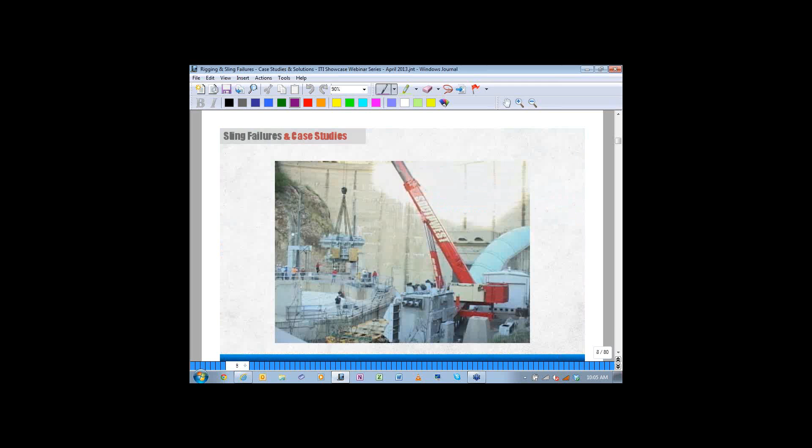So we continued to evaluate that further and segregated it down to slings. Out of those 60, we had 23 sling accident investigations. And of that, I think the surprising element is 87% of those accidents involve synthetic slings of some type. That grouping, of course, is web slings, round slings, or synthetic rope slings.

The predominant type of material would be web slings and round slings. We do have a few synthetic rope slings in the review, but let's take a look at the mode of failure for these slings between the four different categories we initially highlighted: synthetic slings, chain slings, wire rope slings, and rigging hardware.

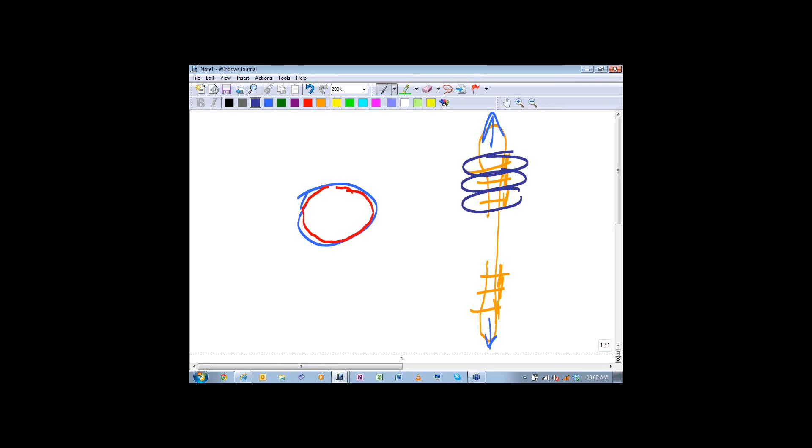So that slight reduction in diameter affects the ability for those cable clamps to actually hold. They are torqued, but over time, that reduction can affect the clamp's ability to hold. That's why Crosby and CM and others encourage us to retorque those after taking initial load. But at the end of the day, what occurred in both of these circumstances was that after the clips were applied, the rope slipped through the clips and dropped the load. Really terrible circumstances and results from that. But there's a huge reason not to be building slings in the field, and this gives us good food for thought as to why not to do that.

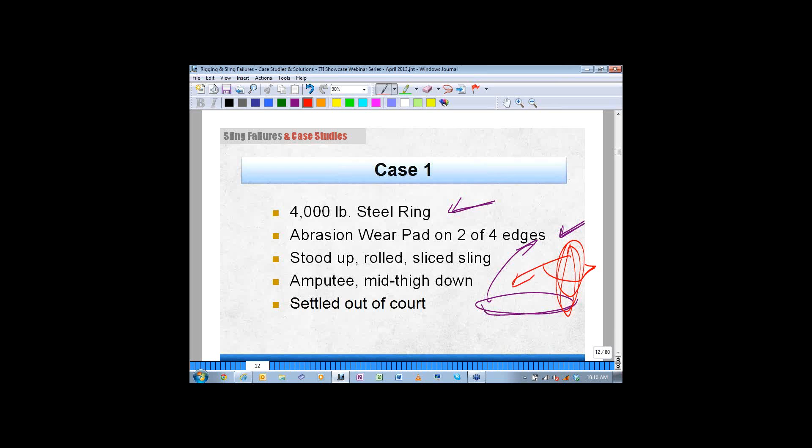Let's go on to our case studies. Case number 1 involved a large steel ring, which I'll show you in a minute. There were a couple of abrasion wear pads on this ring. This was in a machine shop, so it was being milled on one surface. The idea was to stand the ring up vertically with an overhead crane, in a vertical position, then rotate it 180 degrees and lay it back down.

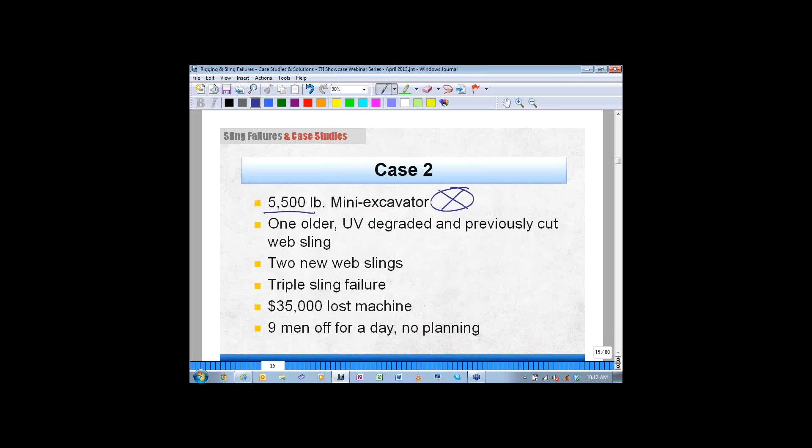This involved a mini excavator and about almost 6,000 pounds. They had 3 slings involved: an older sling that had some UV damage and had been previously cut in a couple of places—I'll show you that—and then 2 new slings. It was actually a triple sling failure, very unusual, but it did. It dropped the whole unit, and pretty good cost. As a result, 9 folks were given the day off as a result of no planning.

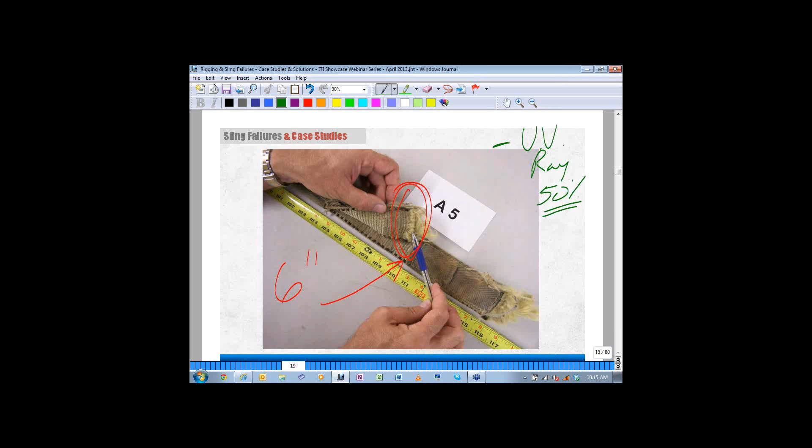This is really kind of a two-step failure—well, three steps really, and I'll go over those very quickly. That has to do with, one, that we had a loss of strength because of UV ray degradation, and we are in about the 50% range based on the age and discoloration of this sling.

So first we have loss of strength, total strength. Second, we had prior damage, and that is the result of these cuts that were on the inside near the wear pad, inside of the bearing point of the eye. So we have inside cuts and outside UV damage, and then we had a slight overload condition.

It's one of those perfect storms of events that show up all collected at one moment in time. They ended up with 70% of the load on that one sling, and they had only anticipated about 50%. Wasn't a lot for the sling, it needed to stay within its rated capacity. However, they did exceed that. But in doing that, they also were fighting prior damage and loss of tensile strength, so when we also overload it, we ended up blowing up the sling.

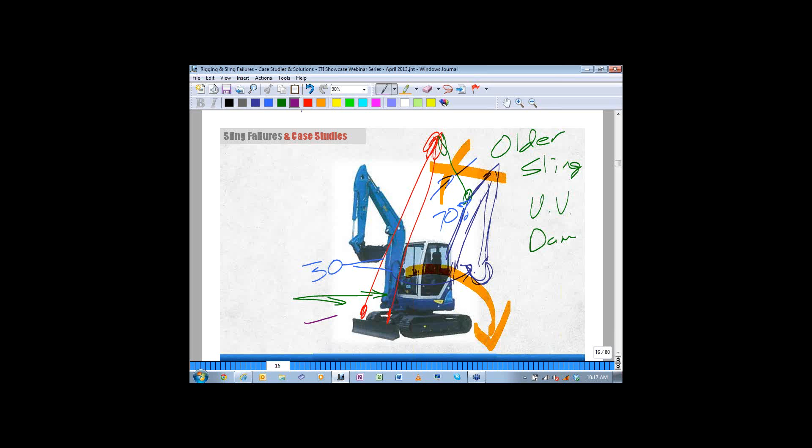And there's some fancy fourth grade artwork for you. So the slings were holding like this, and as the excavator rotated over, the pad eye or lug that was containing that shackle completely rotated, and it pulled the shackle and rotated the shackle actually inside of the sling eye. So we have a loaded sling, dynamically loaded, and the shackle is now hard up against the edge of the blade, and it's rotating, steel turning inside of a sling eye.

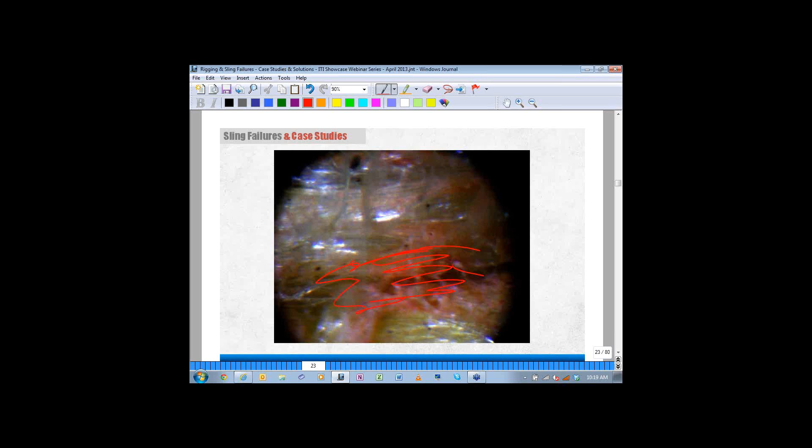So dropping the excavator, very, very avoidable. The first sling was the initiator, and the second two slings simply paid the price for that.

Let's take a look at the third case. This was a large beam, and it was very tall. They were actually erecting or assembling this beam for an HVAC unit on the top of a hotel, using a helicopter to place this beam with. And the slings were used in a choker hitch around the beam, two of them, and I'll just throw in a couple of choker hitches here. And the helicopter pilot did look at those.

It was the beam was about, I'll show you the beam height in just a second. These two slings did not have any protection on them. Helicopters, of course, provide some vibration and dynamics, and they ended up with $40,000 worth of damage as this beam upended and went straight down through the penthouse roof on the hotel. It was a 30-plus story hotel in downtown Seattle, so they ended up with a skylight that they really didn't plan on, but it was a lot of damage.

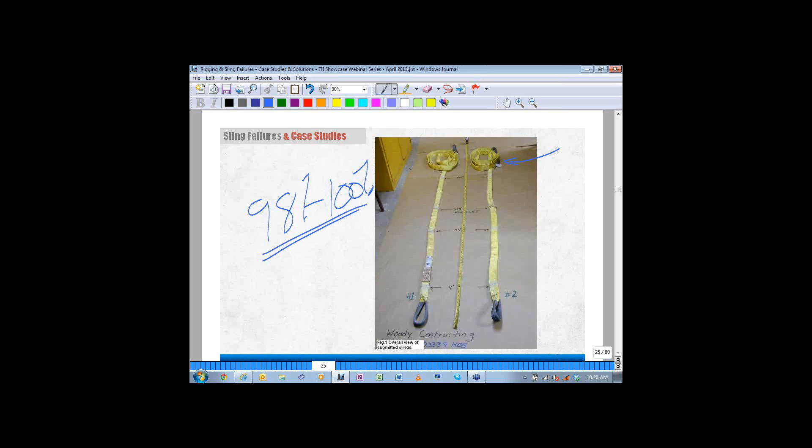Take a look at the slings that were in question. They actually sewed the sling, put an eye back up here in the main body section, and re-pulled these to destruction to try to confirm their original integrity. And they pulled at 98 and 100% of original tensile strength. So they were fine for muscle and strength, a slight 2% loss based on load handling. But they actually proved out the slings were just fine.

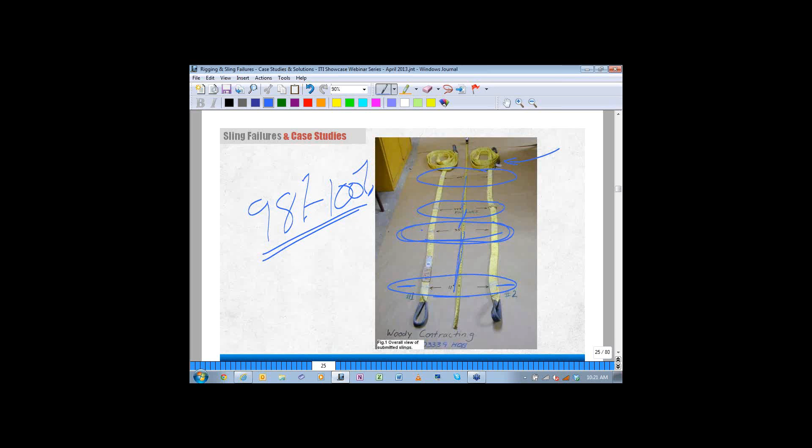Notice this, if you can see the amplification here, first set of cuts were at the 11-inch mark from the end of the eye, another set of cuts at the 33-inch mark, and then another set of cuts at the 44-inch mark, and a final set at 66-inch. So the beam was really 22 inches tall and 11 inches wide.

It gives you a perfect layout of how these two slings were rigged and where the failures occurred. You can tell pretty well where the primary failure was, very clean, fairly square edged. Take a look right here, very straight edge surface, and there was the first failure point. And then as the beam upended, started to turn, you'll notice you've got a curve right here. As the beam starts to invert and go down through the roof, the turn in the sling reflects the curve or the turning axis or the turning orientation of the beam, and there's the second failure.

And this one had friction damage to it as well as cutting. This one appeared to have just more cutting first as its mode of failure, but it was very distinct in the lines of separation. Here's another set of severe cuts and abrasion right there where they were rigged. So you can see, very symbolic of the event.

When folks ask me, gee, how did you think this accident occurred, and they send me a bunch of pictures and this and that, eventually I've just got to get my hands on the rigging or the equipment that's failed. But the evidence will almost always tell you how did it come apart, how did it fail, how did it drop the load. The evidence really will speak for itself, and having and retaining that evidence is very important.

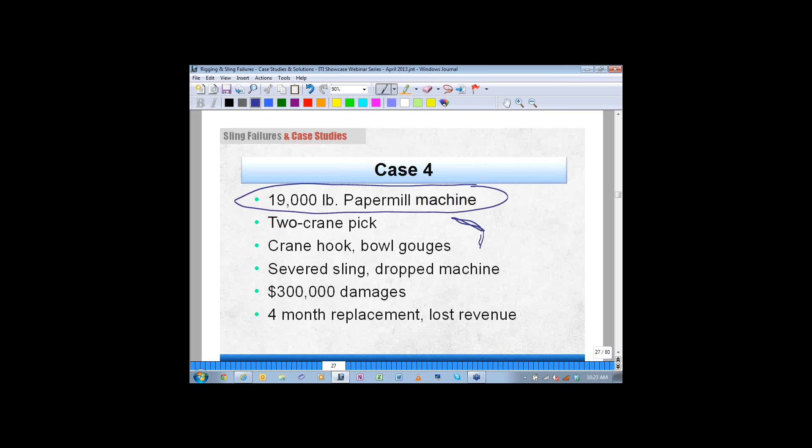Let's take a look then. Case 4: we have a 19,000-pound paper mill machine. It was a smaller machine, but it was large. It was in a crate, and it had hard points about which to basket. But the size and shape of this required that two boom trucks were used side by side to rig this up.

So I'll just give you a quick sketch here. They had hard points here on the crate, and both of these went up to boom truck hooks. This was a fairly good span. They didn't have a spreader bar. They opted to use two boom trucks side by side to pick it straight up and off the trailer that delivered it. And the crane hooks, our evidence showed that we had some damage in the hook bowls, which I'll exemplify here in just a minute for you.

They dropped the load on one end. This whole load came down on one end, crashed, did a lot of damage to the machine inside, obviously broke up all of the crating, and they simply had to load it back on the truck and send it back to the original manufacturer for rebuild. It was a very expensive adventure and something that could have been sidestepped very quickly. Four months replacement time, a lot of lost revenue out of this thing, and very avoidable.

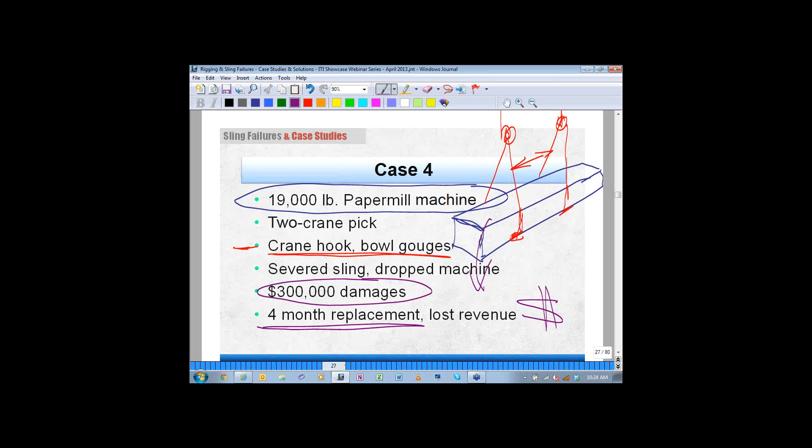And where this really got into a bind, I called the construction company who was involved in this, that was helping during the outage, and I asked the question. I'll just try to do a little bit more of a three-dimensional configuration here. Of course, this was in a swivel, and the hook latch was right here, but the block was here. So I really asked the guy, what was the condition of the hook bowl?

And he said, you know, the sling eyes both went into the hook bowl, and he said, we went out and looked at it - I just got back in my office. Thanks for calling. But the grinding you hear in the background is them dressing the hook up.

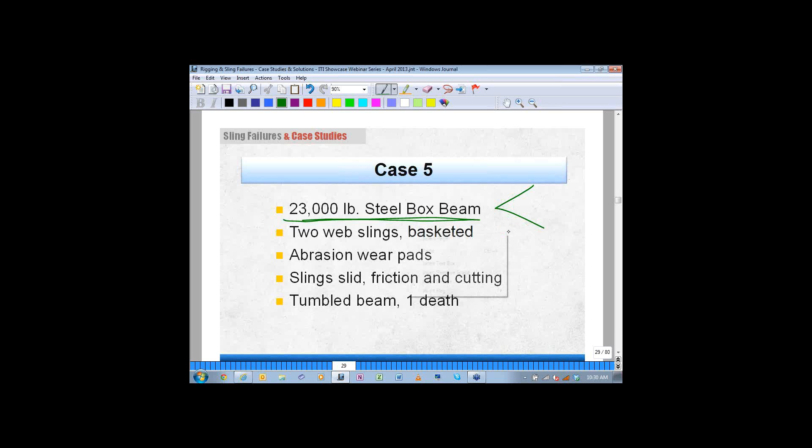Let's take a look at the next one. This is case 5. This is a large steel 23,000-pound box beam, and this was a disassembled crane, and these are the gantry legs for this crane, large box beams. They were basketing using 2 synthetic slings, and we ended up, this was a fatality. We ended up losing a gentleman over this, and the slings slid along the surface, and they were using abrasion wear pads.

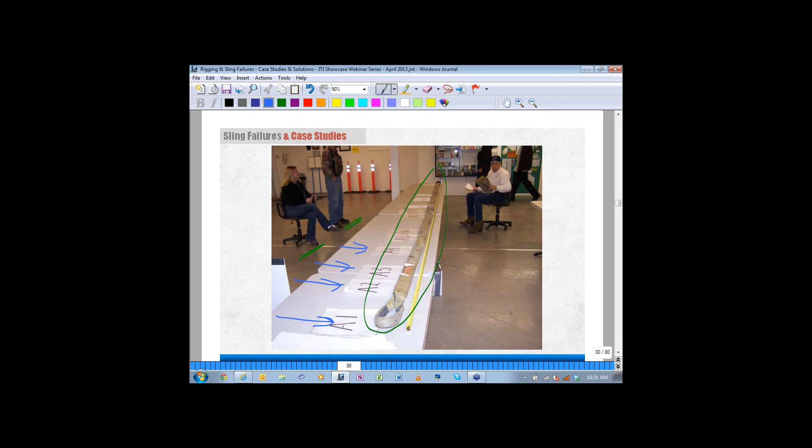So this sling really had seen a lot of service. It had a lot of abrasion already on it. You'll see some degradation based on UV condition, some small nicks, small cuts. Let's take a little closer look.

This is a very, very good example. There are 2 things happening here simultaneously. One, notice how plasticized those ends of the webbing are in their profile. All of this material was very hard to the touch, very brittle, you might say, or very, very tough, plasticized from heat, friction, sliding action.

And really notice how kind of square-ended those are as well. The angle wasn't all that great. It wasn't a huge flat angle that would really initiate this sliding action. We found out that the beams were wet and they were greasy also, but certainly a method for rigging this might have been spreader bars to help spread those slings out and get them more perpendicular.

But we did have an angle there. It was about 70 degrees or so. But notice the other thing.

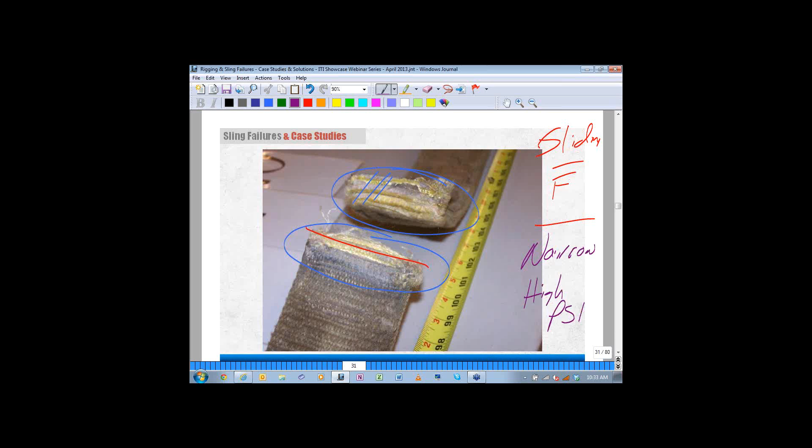We had a sliding condition that created the friction, and the second thing is notice how narrow the slings are. So there is a condition here - we had very high PSI. These were 4-ply slings, with 1, 2, 3, 4 layers of webbing. To get the strength you need, these were high-capacity slings, but they were 4 plies in their thickness. It may have been a little better, though friction was the real culprit, if these slings, instead of being 3 inches wide, were 6 inches wide - that PSI would have dropped dramatically over the width of that sling.

I think a contributor here, in my personal analysis, was that the narrowness of the sling caused high pressure, and as the sliding occurred, it was focused on a very restricted width of sling. If we had a wider sling, with better sling protection, we might not have dropped the load. But I do believe the narrowness of the sling contributed to this overall accident. That's why on boat slings they're wide - 9 to 10 to 12 inches wide - to help spread the load over a broad surface, lower the PSI, and lower the crushing ability to the load. It all has some influence.

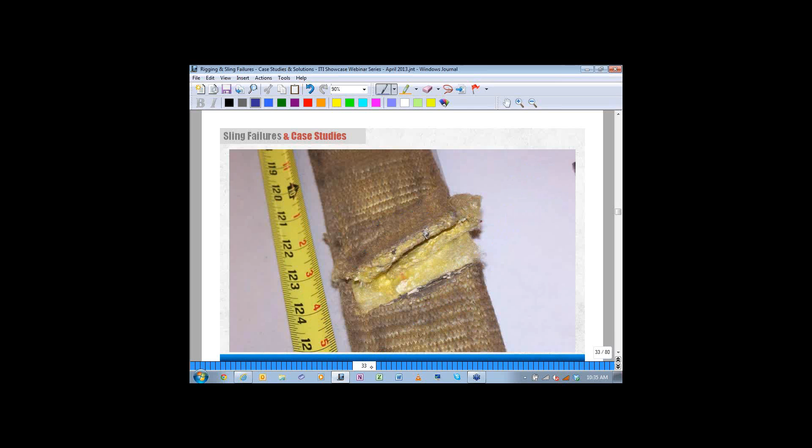But take a look down the sling body. You can see the plasticizing, or thermal damage, to the sling. And then we had some fuzziness with some cutting, but all of this was very, very hard to the finger, to the touch. You'll see these are sympathetic cuts - as the sling slid and failed at one point, it nearly penetrated the other portions of the sling.

Really important to understand here - this was the most shocking part of this particular accident that led to the fatality. They were using abrasion wear pads instead of sling cut protection wear pads. These are very suitable for the right application, but these are 8-inch wide, 12-inch long, or 6-inch wide, 12-inch long pieces of webbing. They're all commercially purchasable, sewn down one side.

They enclose with a Velcro enclosure. But notice the ability of that sling with the heat generated - I dropped this on my shop floor during the investigation on purpose, and this thing thumped. It hit like a rock. This entire surface right here was very, very rigid and solid from the thermal damage, heat damage. You can see the interaction between the sling that had basically ended up penetrating right here, and its contact area on the corner, where we had a sling failure. That whole surrounding area - the wear pad and sling slid as a combined unit and melted the wear pad, in addition to causing the sling to fail.

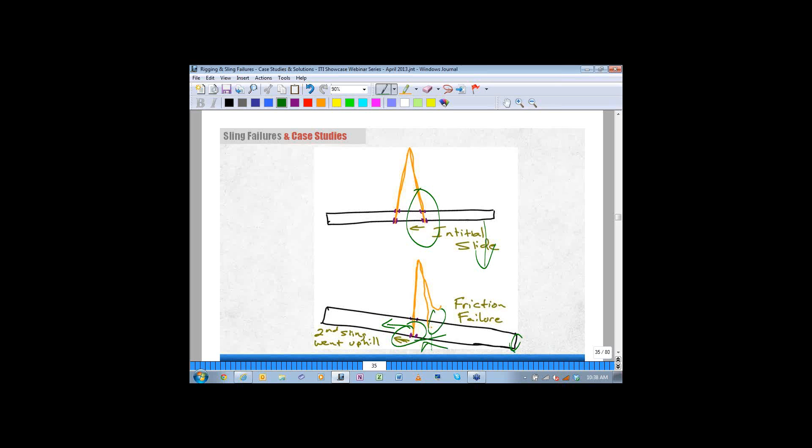This unit eventually tumbled forward off of a large cribbing stand and fell onto the rigger on the ground who was giving signals. The gentleman was standing right here in front and ended up as the victim in this case. So the sling angle wasn't very low - it was a very large, tall angle from horizontal - but being wet, oily, and greasy, slings can slide. So you just want to bank on... here's a case, and I'll just draw this in here.

Here's a great case for a spreader bar going up and then using perpendicular slings right off that bar to encourage straight vertical leg loading and lowering the potential for sling movement along the surface of the beam. Certainly, we still would have been obligated to improve the protection between the sling and the load surface. That was still an issue for me. The load's 23,000 pounds, so the PSI is very large on those sling contact points. We needed better sling protection to hold that sling off of the load.

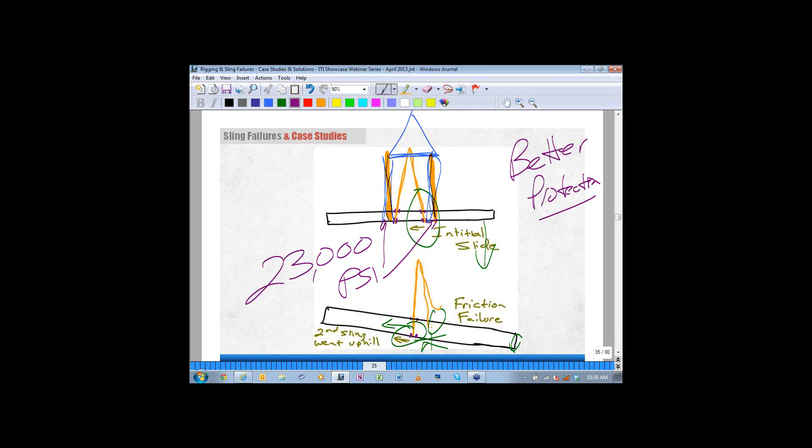The statement is: yes, my organization has experienced a rigging accident within the last blank months. So let us know if that's 3, 12, 24, 36 months, or none that you know of.

Mike, can you help define what a rigging accident might be? I think in this case it's really anything from the crane hook down. If it's a mobile crane or overhead crane, it's not related to tipping a crane over or an overhead crane coming off the runways. It could also be chain falls, drifting a load inside a structure, inside a ship or engine room, or leveling a load with chain falls or come-alongs. Particularly it's about the interaction between the sling or slings and the load, maybe a loss of load by tumbling out of basket hitches or choker hitches. We might have had a failed hoist sling or eye bolt, or a failed rigging hardware component of some other type. So the question focuses from the hook down, not from the hoisting mechanism, but from the sling and hardware connections used to employ the load lift as a whole. That's the focus of that question.

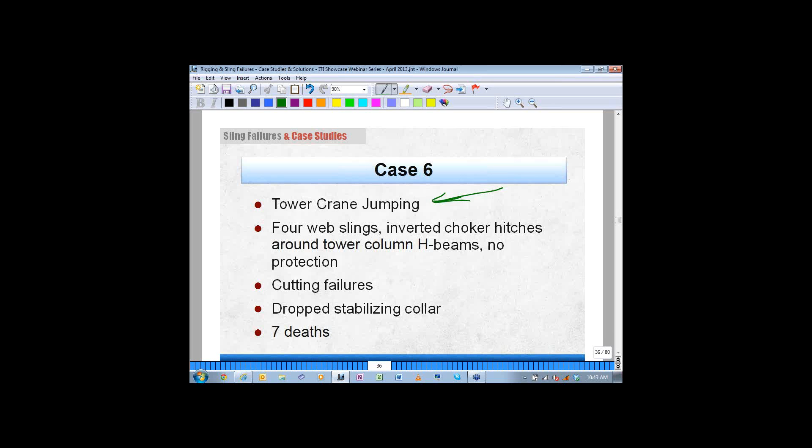Let's take a look at the 6th case. This is a tower crane jumping incident we were involved in - I won't use the name. This one resulted in 7 deaths. Let's take a look at the issues that are currently evident. Four of these slings were used, and these were very short slings, only about 4 to 6 feet in total length. Take a look at some of the failure points there.

And I'll get a close-up shot of one of them. But I'll tell you what, without any sling protection, if an edge is able to actually cut the tag that cleanly, I think that's the most remarkable part of this, is that we've got damage right in here. And notice how sharp that was able to separate that tag in addition to the fibers below it.

So just note how you could have taken large shears to cut sling material or leather and just done the same amount of damage as we did here with the load contact point. Very avoidable, and this is something that can happen at a fairly strong angle right there.

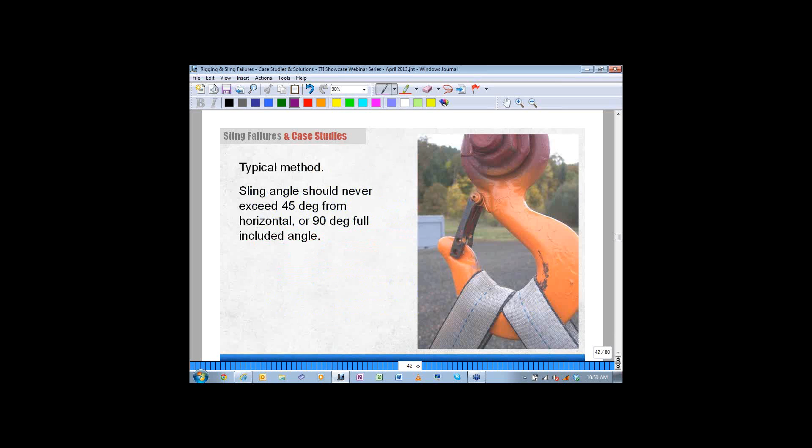Let's take a look. I just threw in 3 or 4 slides here to help us out, showing a typical rigging method on a crane hook. Notice that the maximum recommended angle is 45 degrees from horizontal, or 90 degrees full included. We don't want excessive angles that add tip loading potential, and certainly these hooks need a clean surface. 2-inch flat web and round slings just fit and make that angle work, but make sure we inspect that hook for its condition and how it's going to treat that sling material.

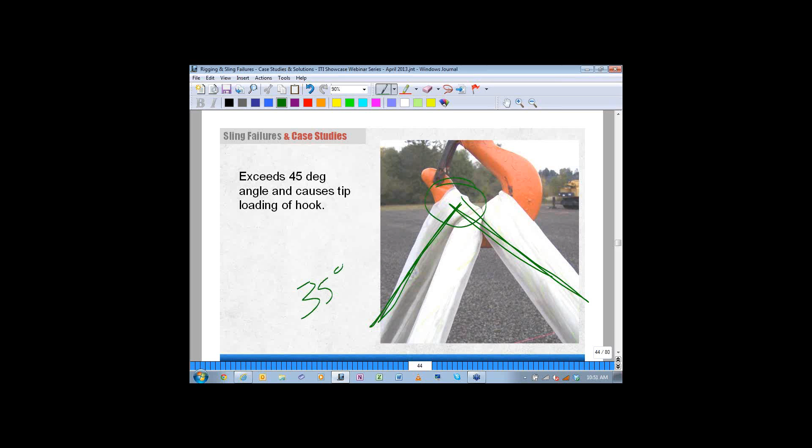Let's take a look here. We've put 4 slings on the hook just for an example, and notice that we've now exceeded from most extreme to most extreme. In perspective, we're really at about 35 degrees here or so, and we're really crowding that sling up on that hook. A good solution: we don't want to overcrowd that and also get flat rigged.

So sometimes what we can do is drop in — and we use a lot of these in our facilities in Memphis and Woodland both — is use a master link at the top, with a sub-assembly coming off of that, and then whatever slings need to rig off of there would help step that off the hook and also give us some hinging and adjustability. These hinging points right here and here help float out the tensions to a 4-way a lot better than just going straight to the hook.

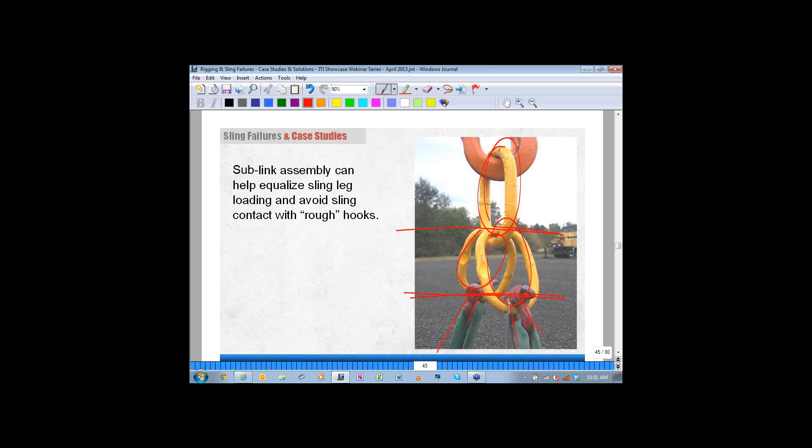You know that often when we rig up 2 legs to take load, or 4 slings to take the load, sometimes only 2 slings carry. So the more hinge points we add into the system, sometimes that will float that out to make it 3 carrying out of 4, or sometimes 4 carrying out of 4, depending on the adjustability of that hardware.

So it's very good. And one point of information — you'll notice right down here on the bottom, in this area towards the bottom, we've got a tag that's attached to that master link. On that tag, it states the rated capacity for the large master link and also the rated capacity for the sublinks. So anybody picking up that hardware knows what the rating is for those links in series right there, and there's no guesswork involved.

So always make sure — because master links, according to ASME B30.26, which is the rigging hardware standard — master links are in that rigging hardware document, as well as shackles, dynamometers, swivel hoist rings, eye bolts, turnbuckles, wedge sockets, and cable clamps. All those links, rings, and swivels are all included in that hardware volume.

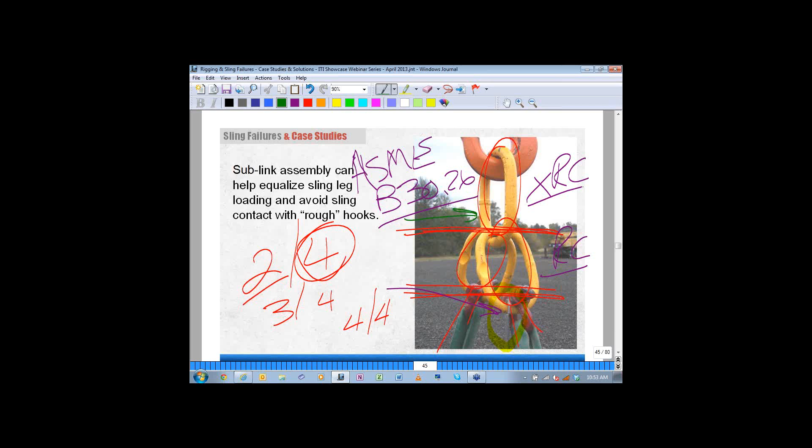And in that standard, there is no requirement that these master links be marked for rated capacity. They need to be detailed out on a spec sheet or a cut sheet from the manufacturer's product catalog, but they get used in wire rope sling assembly, web sling assembly, and chain sling assembly. So what happens is they're depending on these master links being incorporated into those sling types, and they let the tag on that sling assembly represent its rated capacity.

So in this case, we might have this particular master link assembly that you see in front of you. It could be used for a 4-way wire rope sling assembly worth 24,000 pounds rated capacity. It could be used for a four-leg alloy chain sling that might be worth 21,500, and a 4-leg web sling that might be worth 20,000. So in all those cases, they're going to let that tag represent the entire assembly's capability.

That's why the manufacturers do not stamp the rated capacity on the master links — because they want to make sure the final fabricator will rate them according to the material they've rigged them with. However, we use them for rigging components. We'll use them on a hook to help create rigging points for attached shackles, chain falls, come-alongs, and all the other kinds of equipment we want to rig from, and we'll use them just like extended shackles. They're great tools — great to have available, slap them on a hook, and rig from there.

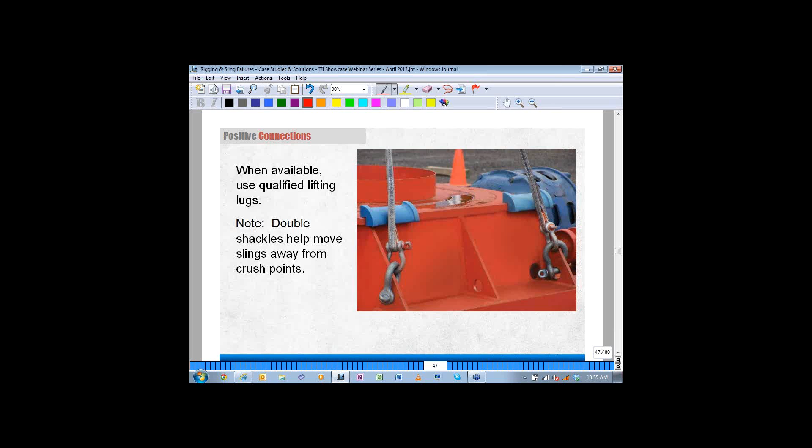The first frame really is, if we had our druthers, if we had our choice, we would go with what we're going to call a direct connection as our most preferred method. Direct connection means I've got hard points to connect to on my load, and I don't have to choke or basket it. The minute I start choking and basketing, I've got to contact the sling to the load.

If I could shackle it or hook it directly to the load by some hardware connection point - notice what we did here, we double shackled right here, and the double shackle moves the sling away from a crush point or a contact point on that gusset. That's an approved lifting point, but if we hadn't put that second shackle in there, that sling would have been very much involved with that gusset with that steel plate, and we wanted to step that away. So what we did was add a second series of shackles to step that up and off, and then let the sling make the connection.

And even on top of that, you can notice we put on some corner protectors just to make sure if the load would pendulum or do anything unusual, we had hard steel plate right on top of the load, and we wanted to make sure and not let the sling interact with that. So we just put some magnetic corner protectors right there to avoid any contact.

So the first one in our decision tree is, do I have a direct connect possible load? Can I make a direct connection and avoid potential sling contact? That helps clean up everything, and it helps minimize or lower the risk. This is all about lowering risk downstream for all of our rigging activities. So can I make a direct connection? Let's go to the next one.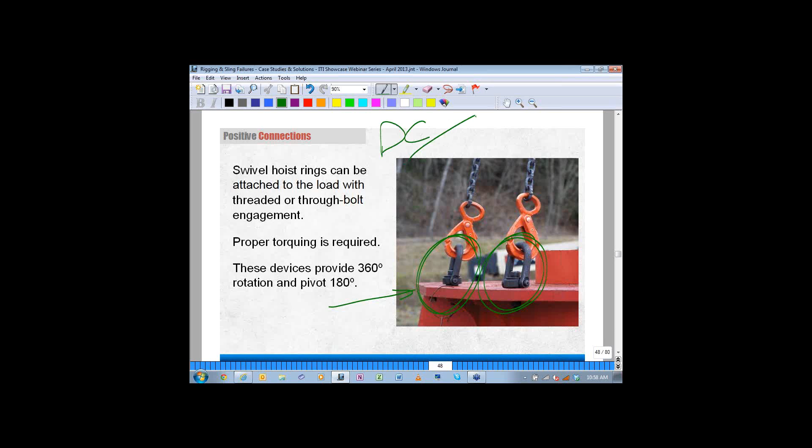So one is direct connection, and the second one is create my pick points, and that are also direct connections. So if I don't have them already naturally, can I create them by using swivel hoist rings?

For all my friends that have been attending a number of these webinars, you know I'm a big fan of hoist rings, and there's probably a dozen different styles, types, and pedigrees of different hoist rings out there. Crosby is a manufacturer of those. CM, RUD makes a terrific line of hoist rings, and others. But there's a lot of options - take a look at a lot of the catalogs that your rigging supplier can provide you and start looking through what particular connector might work best for a particular load, because one won't do everything.

These are through bolted and nutted off on the bottom side there. Some come threaded so that you can just use them into a threaded connection point that will accept that bolt. Some are through bolted - there's a pass-through hole and then a hard washer and nut off the bottom side.

So in this case, we did not have a direct connection opportunity, so we went to creating our own pick points. Let's go to the next step. If I don't have either one of those - we've used this all on the same load - can I find a place or a way to create stopper points that would stop sling movement?

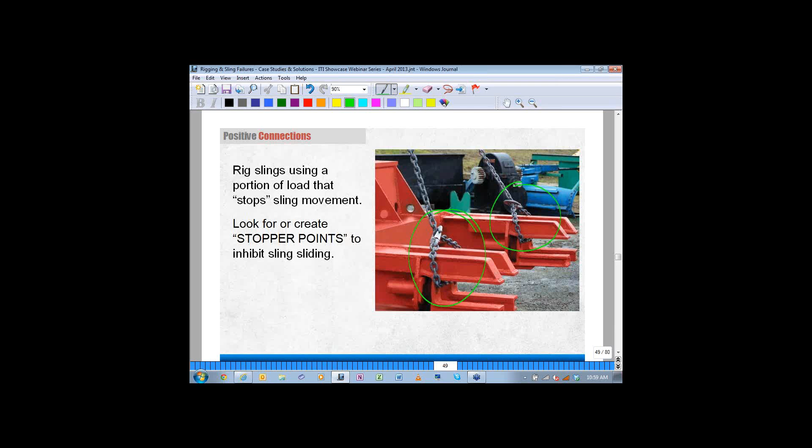So we looked at the load real hard and said, we've got a nice platform here and a wall right here, so we choked right there. We do have the opportunity, the load is very acceptable to the capacity of these chain legs.

The chain sling's very robust, and within capacity you have the opportunity to go around a 90-degree corner as needed, but you always want to check the rating and any limitations. This case is perfectly acceptable and legal. The beauty is we found a place to slide the slings up to a wall or stopper point so they cannot go further into the load. All those sling legs go up to a master link, which goes to the hook, and there's no movement anticipated since we're against a wall. So I've got direct connection, created pick points, and now stopper points. That's my third option in the hierarchy.

Let's go to the fourth option. Will a spreader bar help us take away the opportunity for the slings to run? In this case we've got slings that are base material wrapped around the load pick points, and with PSI based on sling connection points and the width of the sling, these are very suitable for resisting the sling from penetrating that material and coming up to the connection point on the spreader bar.

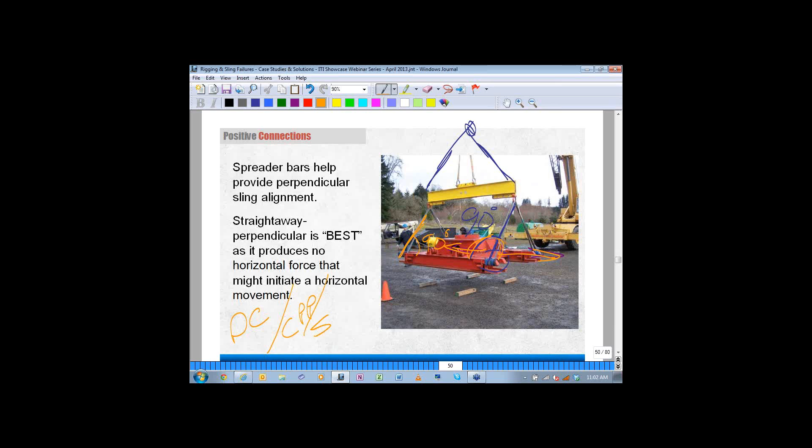So going back to our score sheet, we've got direct connection, created pick points, a sling stopper point, and we've taken away sling sliding by 90-degree rigging using a spreader bar. All my hieroglyphics there. Okay, let's take a look at the next one.

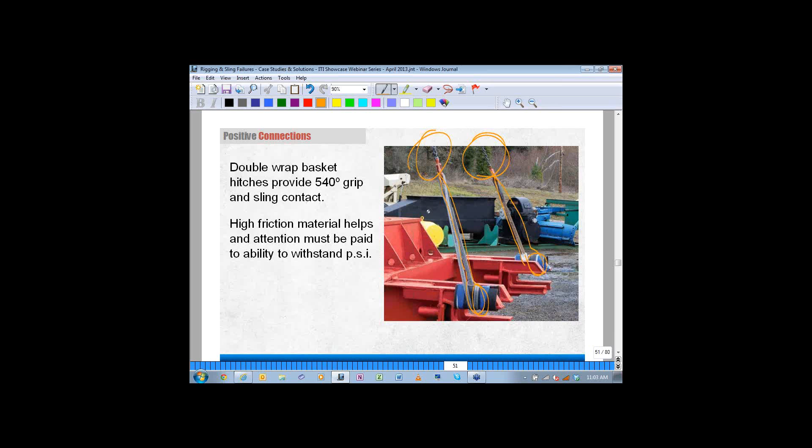We've gone with excessively long slings. Notice we've used chain slings up here at the top for the initial leg extensions off the hook, and then added double wrap baskets on each bearing point. Part of this is baskets equal greatest capacity, and that's always a good thing. Based on our vertical choker and basket options, baskets give us great capacity, double wrapping gives us friction control and grip, squeezing the load and helping minimize the opportunity for sling movement.

In this case these slings, this compound angle runs towards the center of gravity right there. This angle is in the 70-degree range or better. We want to rig at or above 60, so we're at 70 here, we're in great shape, very low risk of running. What we didn't do is push those slings up against that hard wall right there. We let the gripping action of the double wrap do the securement for us as we applied the slings to the load. So no spreader bar at the top.

Everything meets at the crane hook at the master link. Nice long slings, double wrap baskets, great capacity, very minimal risk of sling movement based on the sling protection material as well as the double wrap and nice tall angle. So there's our long legs, a big adder. Nice long slings, good angle, double wrap, and basket. That helps refine our selection list.

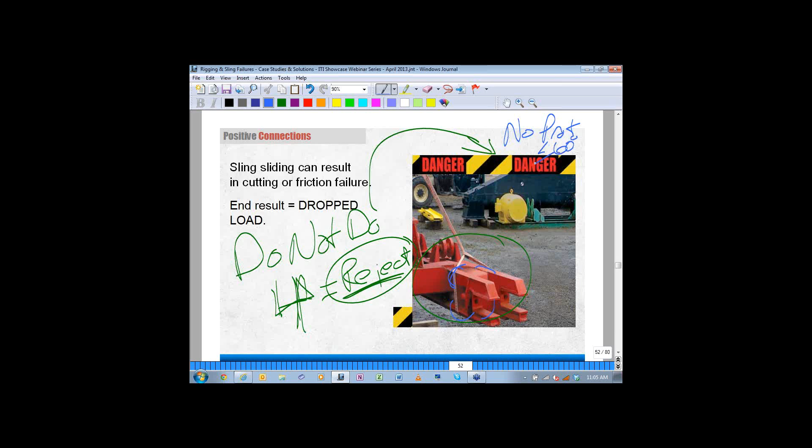No sling protection, nothing in here to protect the slings at any of these corner points. So we had no protection. We had not a great angle - we were probably at 60 degrees, less than or equal to 60 degrees, and we had a choker hitch, which is okay to rig with, but we had the lowest capacity sling being used in that application. So the thin sling, narrow sling is only 1 inch wide. We had a high PSI.

I mean, we just sort of keep going down the list here of all the bad things related to this. But at the end of the day, we had to reject those slings from use because of damage created by this one particular pick for this photo opportunity, to help demonstrate something that was really a great thing to avoid at all costs. Okay, let's keep going.

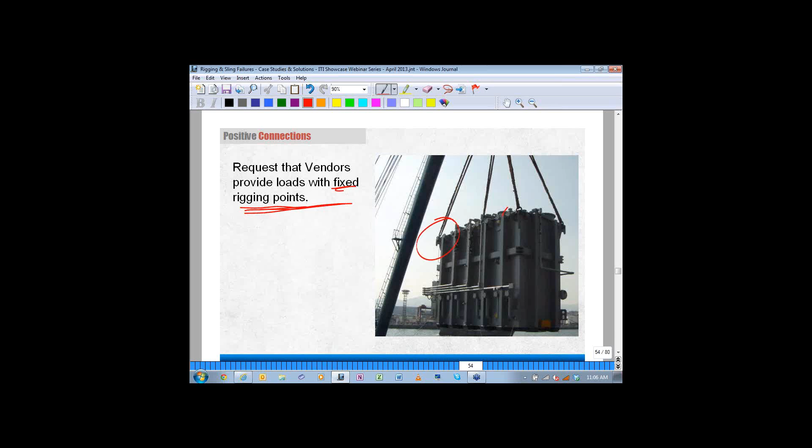Recommendations - how do we fix some of these things? Well, first thing I'd suggest to you is when you are talking with the suppliers and vendors, work with them on trying to get fixed rigging points on your loads. These fixed points will help a lot in avoiding sling contact to the load, and they end up at good structural lifting points. They've been reviewed by an engineer, hopefully, and their integrity is there, and it helps keep the slings away from the load. So anytime we can, let's ask for good pick points on the load.

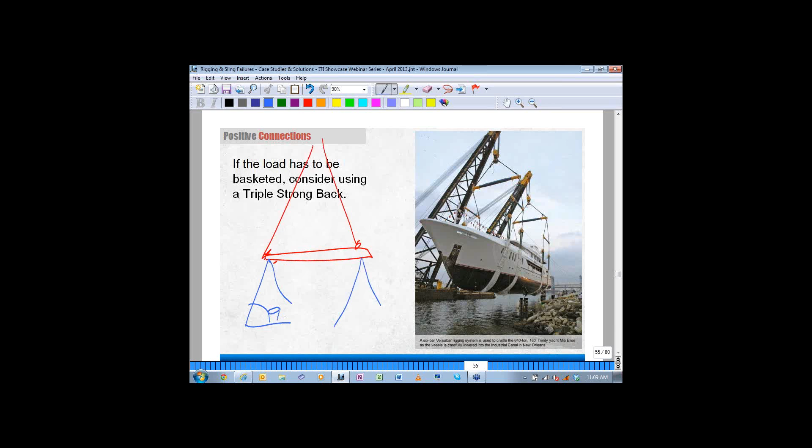When you need to - in this case it's a triple strong back, but even a single strong back or a triple spreader bar or a single spreader bar will work. I'll just draw one end, and if you all remember from our previous, you can have 4 legs coming off. They help hit that load at 90 degrees to the horizontal, to the long axis of the load. In either case it could be baskets, but what the spreader bar does is it takes away this angle issue.

So if we draw in another set of slings that without the spreader bar, we want to come down here like this, come down here like this - we're causing that sling to try to pull in. So if we can take away the desire for the sling to run by using a spreader bar or a series of spreader bars, we will lower the risk related to our load handling activities.

Notice in this photo, these guys have done a great job. They've got 2 crane picks - here's one crane and another crane. Off this particular crane, they've got one spreader bar at the top, feeding down to smaller spreader bars right underneath, and those slings are suspended from those baby bars. They've done that twice, spreading the load out over numerous slings, 4 slings in this case.

Everybody hates to drop a big yacht, and it's happened more than once from loss of control based on poor rigging methods. Let's take a look at the next one.

This kind of helps when the center of gravity is below the pick points, or you've got an unusually large load.

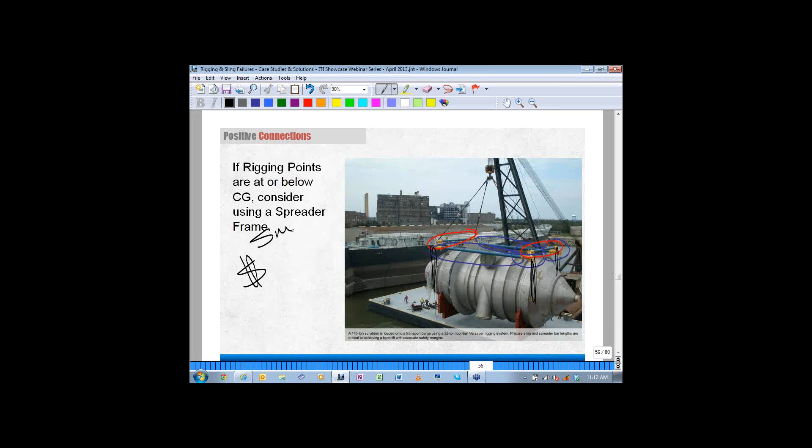We just did a job for a longshore stevedore company for moving a large vessel off, and we used Lifting Gear Hire, LGH. Take a look at their website. You can rent all this gear for the necessary load to be handled for a week or two weeks, send it back out, and they can send you modular bars for use for a variety of applications. We're not endorsing anybody, I'm just giving you one lead there, and we will show you some other manufacturers of products in just a few minutes. But folks that do rent gear, this could help - you don't have to buy all of it. Sometimes you can rent it at very short term, but it's very important to handle the load that's assigned to you.

So let's look at sling protection.

Let's go back one here. Here we put in a crescent-shaped thimble. Notice that this thimble is actually kind of burying inside there, and it's actually a cast thimble that you can add on after the sling is fabricated. It's got little ear tabs on it, and it could go in the eye of a sling. I'll put the sling up here.

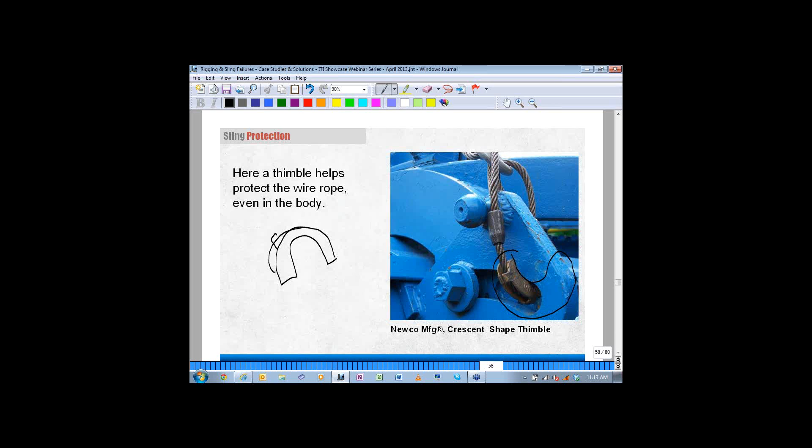So you can add it on to the eye of a sling after fabrication, or in this case, this is an oversized thimble that we've used in the belly of a basket hitch to go around a hard edge. Those ears have been bent over, and that's a permanent kind of basket hitch. We can roll the sling over constantly and do inspections on it freely, so the inspectability is all great. Newco Manufacturing out of Kansas City makes those, and those are almost always available through your rigging supplier wherever you're at locally, and other manufacturers make similar products. It's a great place to do a basket hitch, sling protector - hard, significant, robust, easy to spread that load out over a large surface and cradle into hard pick points. So there's one way to use an oversized thimble to help protect wire rope slings, chain slings, web slings or round slings, to help get around some hard surfaces.

Let's take a look at the next one. This one actually came from Italy, and there may be a couple of manufacturers here locally that produce these. We use them - we've got a couple of them here, but they're magnetic aluminum. They've got small magnets on the inside, but it's 2 pieces that hinge.

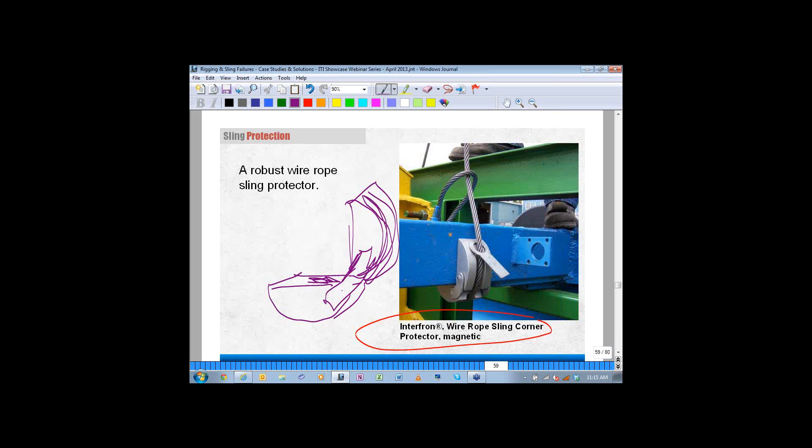So a great place to insert or install a wire rope sling protection system that'll let the sling keep it from being damaged by the edge and give it a lifespan to live another day for other lifts.

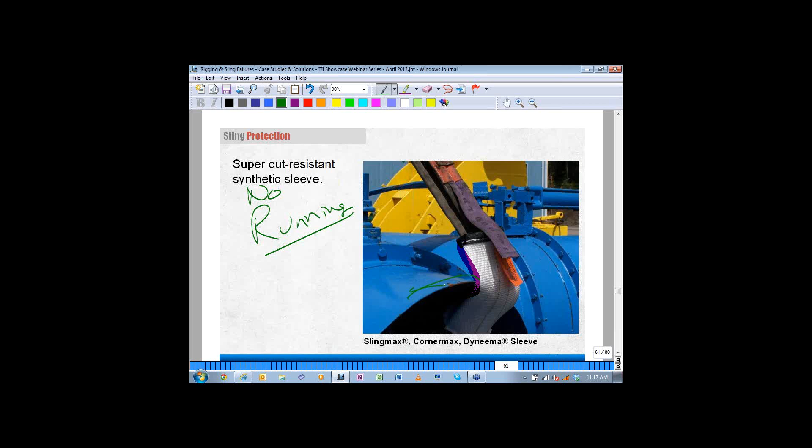A similar product, I'll show it to you in just a minute. This is a Dyneema pad. This is a very high strength sling protector. It's a tube, a sleeve, and it's made for edges. The main caution is you don't want it to run. I'll just put 'no running' up here. Straightaway pulling, it's great, but you don't want it to slide or run sideways on you. But it has very high durability and cut resistance to an edge.

Check with Dyneema through SlingMax and other Dyneema resellers and find out what the engineering is behind it. We have some of these on our property as well. They do work on particular applications, obviously very flexible.

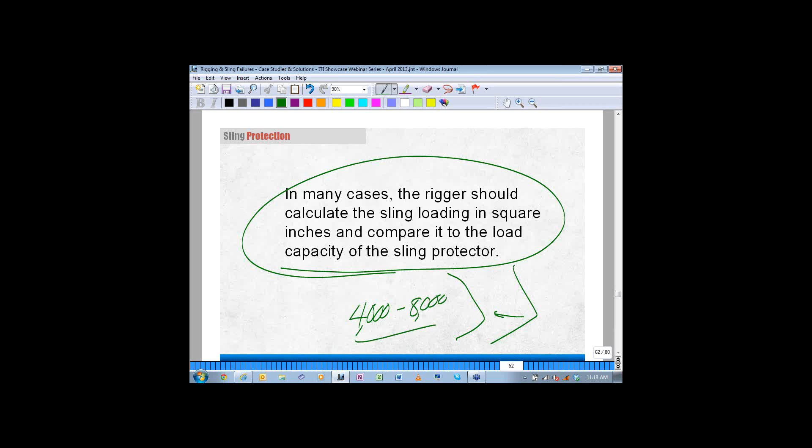Let's take a look. One thing you want to do is calculate the anticipated PSI at the corner so that we understand what that sling is going to impose onto the corner in pounds per square inch. Sometimes in the 4,000 to 8,000 pound range, you can shear right through those old web slings, old fire hose, all that. It's very easy to shear that material out of the way. Old nasty conveyor belt sometimes will shear. So you want to do some calculation: how many square inches, what's the loading per square inch that I'm going to impose on the sling at the corner, and is my sling protection robust enough to withstand that?

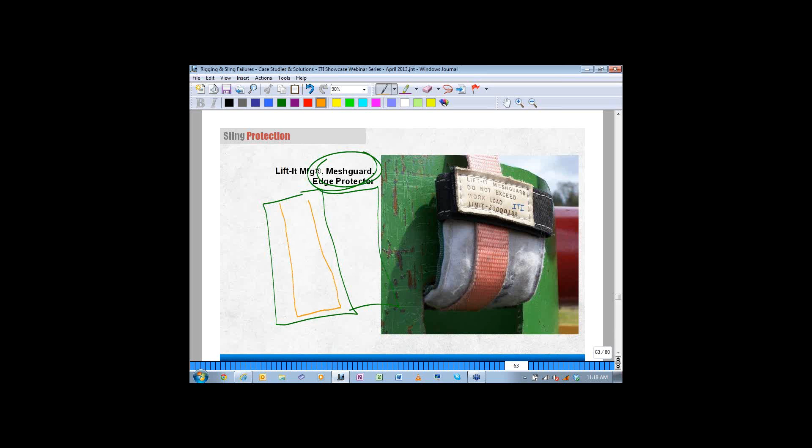This is one I particularly like for numerous applications, and it actually uses metal mesh like we use in metal mesh slings. They take this, I'll just draw this out quickly, but they open this piece up here and insert a piece of metal mesh material. It might be 12 inches wide, and then they'll sandwich that in. They'll close this up and sew it down, and that metal mesh is now embedded in a sandwich between some very robust synthetic protection material, and then the sling wraps around the outside of that.

So the sling is laying outboard of that, and there's actually steel between the sling and the load. It's very flexible to the load if it's a 90-degree or sharper edge, maybe a more robust break edge. It's great, in this case, they've got a limitation. They've actually published a 20,000 pound limit for that sling bearing point right there. So it's super material, one of the best flexible sling protectors I know of for a lot of applications where we want to hold that sling off the edge.

And these stack up very well. Of course, they've got Velcro keepers that keep the sling in place, they lap over and keep the sling in place. But these are phenomenal, and they do a great job, and I compliment the inventor and also the resellers for making sure that they're available in the marketplace. We would encourage you to start building your sling protection inventory.

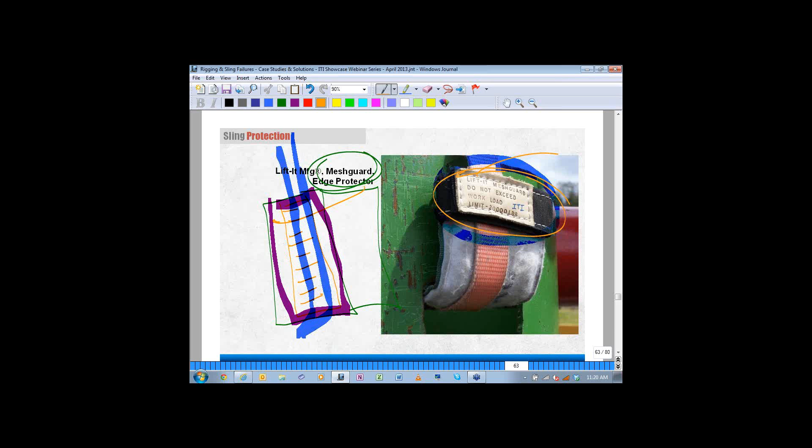Let's go back to this standard wear pad. This is the old abrasion one that was in that accident, but it's suitable for wood. Got some rounded edges there or other abrasion type things, but this is not for cut protection. So it's limited.

I think that's the main thing, limited use for rough surfaces. That's really its forte, to help protect against that, to help hold off abrasion.

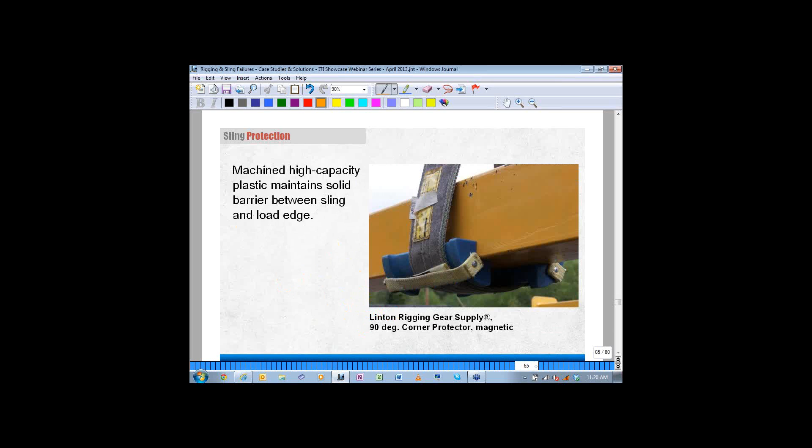Let's take a look then at these—you started to see these in the marketplace. Linton Rigging Gear Supply makes magnetic synthetic corner protectors that will attach to the load. We can run slings around them, and they have shoulders to keep them in place. It's the old system or style of corner rounds.

We used to cut out a steel pipe or aluminum pipe to help break the sling edge around different corners. But now, with the advent of magnets inside, they're machined to a particular dimension, and they come in 4, 6, 8, 10, and 12-inch wide pieces, and they work great.

They actually make them for I-beams too, I think the next frame shows them. I'm not a big fan of rigging I-beams with synthetic slings, but in this case, with that type of sling protection, I think you'd probably be in good shape.

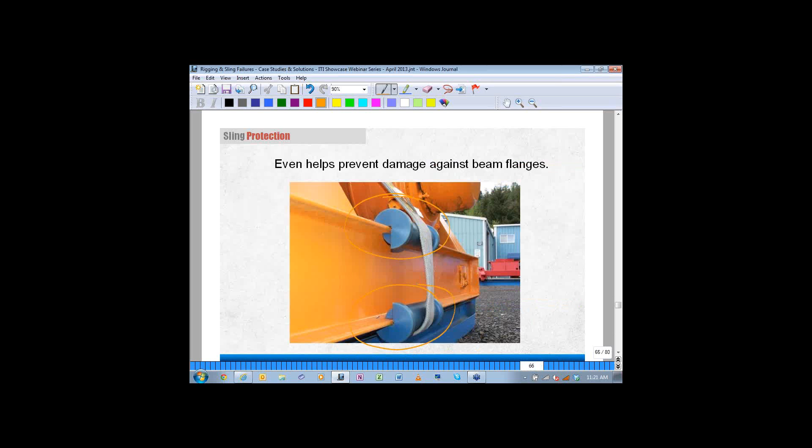The main thing is the sling's got to be able to stay in the track and go up, not be encouraged to move in either direction. With a spreader bar, that's great. But rigging up to a single point on a crane hook might be a challenge, because that sling may want to drift off at an angle, and if the sling protector isn't in the right place, it may try to walk off—any sling protector. So make sure this is a great application, like a spreader bar with 90-degree face loading, perpendicular to the load face.

All right, let's take a look. We know that these old style abrasion pads will not do the job we need, particularly with cutting and some friction damage.

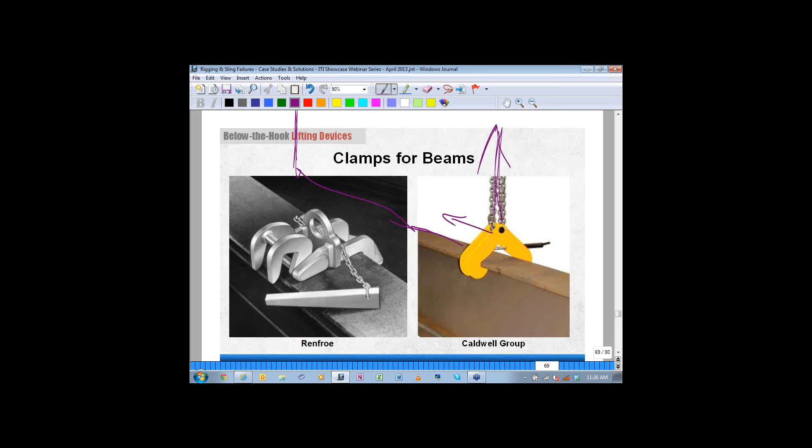There are beam clamps out there for use. They're limited in how they're to be applied, quite often limited to vertical loading only. That would probably include a spreader bar, two of them in this case, one here and one further downstream. So they really need to be used properly. These don't do too well if we're trying to slide them, because of angular loading. So they have limited application, but when we've got to grab a beam, sometimes instead of wrecking or cutting wire rope slings, or certainly synthetic slings, maybe beam clamps will be a better option for us. Some are more robust in their design.

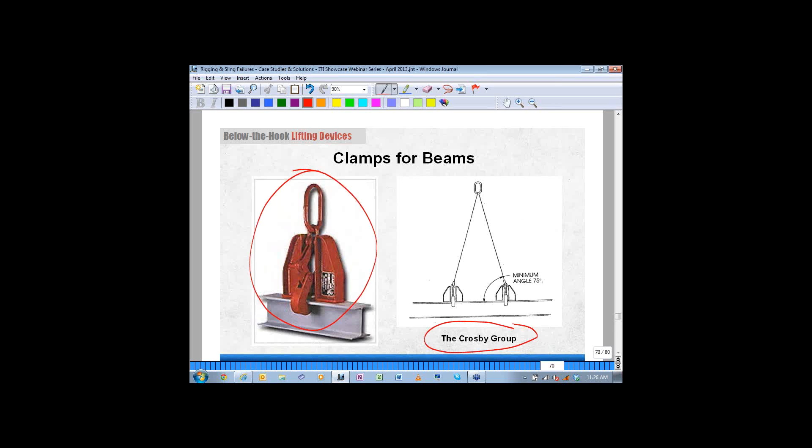Great beam clamp here - I've tried to put in the names of some of the manufacturers we've drawn from, just to help highlight. Crosby Group makes these, and they have a minimum angle requirement of 75 degrees, that's 15 degrees off the vertical. They are rated, and they will lock in and hold the beam and not slide along it. So some good options for beam handling right there.

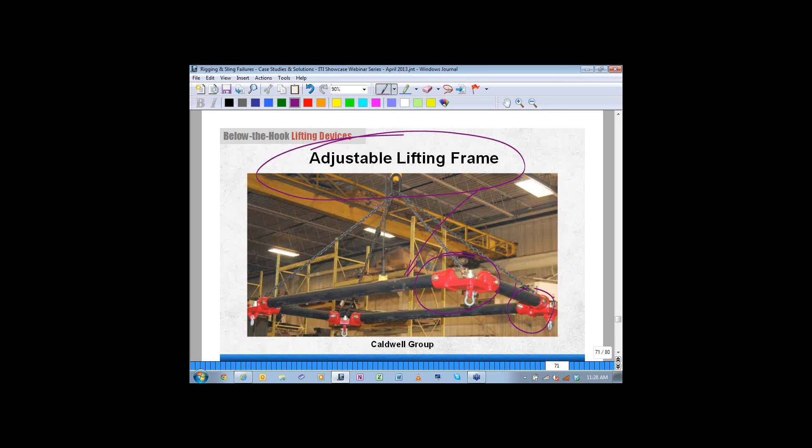But this is a great assembly, and you can actually buy this in a kit and buy the pipes necessary for it based on specifications. They've got these from 6 to 9 tons, spread up from I think about a 4x6, and it can be expanded up to a 12x12 based on this particular type of assembly. Chain slings, the top side rigging, may be permanent in nature, and then we just change out pipes to help accommodate what we have, and also to accommodate headroom available. So it's a great kind of universal assembly, can be used in a lot of manufacturing or other areas that have adjustable requirements, various loads of various sizes and weights. Pretty high capacity actually for what we need. Nice option - you ought to take a look at it.

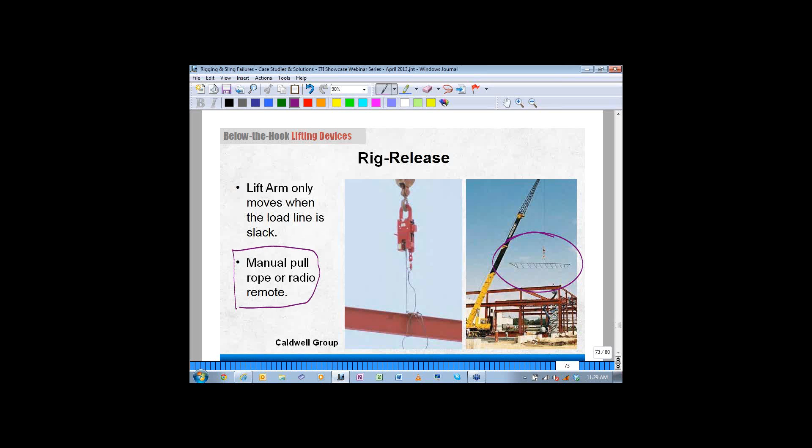This also is made by Caldwell. This is a rig release, for setting trusses in construction, or where you can't get immediate access to release the rigging. This has a pull rope or radio remote control for release, and will not release under tension, so it has to be completely slack to disengage. There's a load pin right in here that holds the sling in place, and once you pull that load pin by pulling the trigger with no tension on it, you're good to go.

I think I actually have a picture of this where they're Christmas treeing, able to actually rig. There's one, there's two, there's three, and there's another down below. This is Christmas treeing multiple beams up for high use, high efficient rigging.

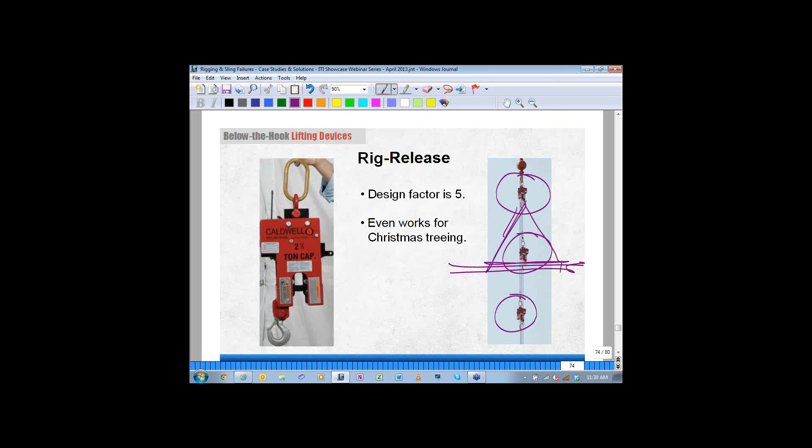And so of course then each beam would be rigged off of this, and the beam would be down here. Once you get the beam set, you pull the trigger, the slings simply drop out of that and stay connected to the load in the appropriate manner. So a great tool, good for access from the ground or radio remote. The guy doesn't have to be right in the basket to help cut the rigging away after we've set some trusses or some beams.

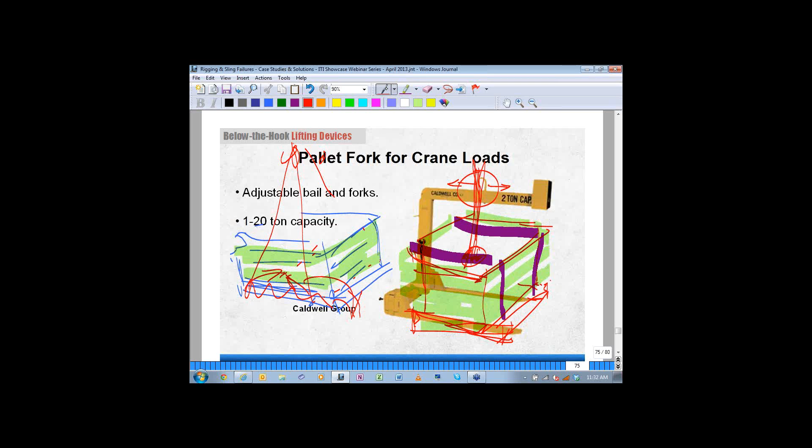Never send anything up where somebody thinks they're doing you a favor by cutting the banding away at ground level. The worst thing you can do is cut it away at ground level - we really need it to stay as a unitized load before it gets up to landing. So make sure it stays as a solid object.

Here's a nice little adjustable spreader bar. A lot of people make these. Notice the pinholes right here - you can expand or retract the spreader, and the slings accommodate to the worst load angle, and they're rated for that. Sling hooks are rated for the beam that's connected to it as well as the master link.

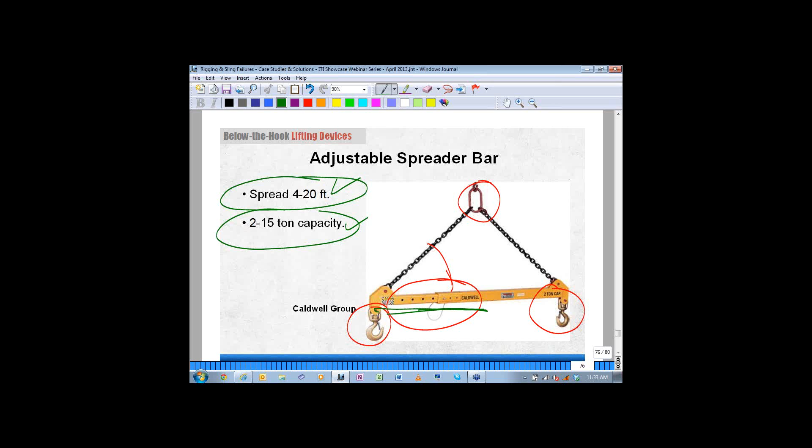So we could retract this to, say, 4 feet, expand it to 8 feet, or maybe 6 feet in this configuration. I noticed Caldwell sells a couple of adjustable spreader bar lines that go from 4 to 20 feet, anywhere from 2 ton to 15 ton. The shorter the bar, typically the higher the capacity. These are available, and the reason we want this adjustability is so we can use them for various loads in our facilities - we don't have to buy 16 spreader bars to do the job that 2 or 3 could do.

Here's a unique little lifter by Bushman. It's a counterweighted spreader bar or lifting beam, and this counterweight out here will trolley in and out based on the load's position. So just before the load is picked up, this is trolleyed forward, basically at the center of the bar. As you accept the load, this can be trolleyed out to its most extreme stopping point to counteract the weight of the load being suspended. You can put a load in through a wall on a building, set the load down, and then trolley forward our counterweight as it goes to zero for load weight.

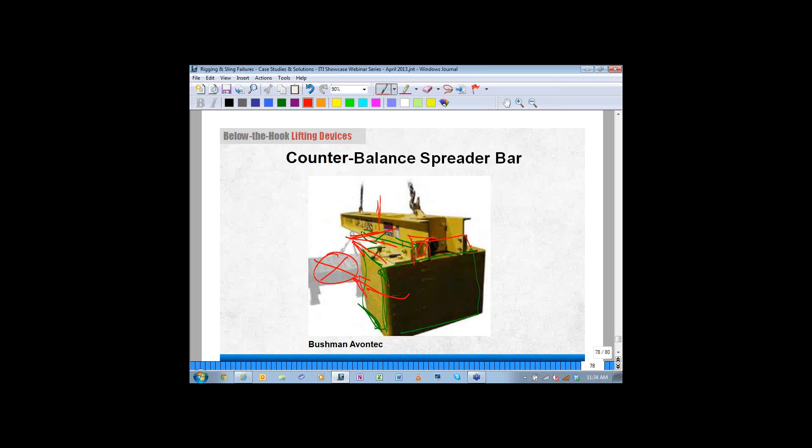So a great tool to help set a load into an enclosure, or a third-story, fourth-story barn door, or side opening in a wall in a building to help land loads up there from the outside. All kinds of unique tools out there that can be helpful for us to get loads in place, manufactured and off the shelf or unique and quickly available based on your call.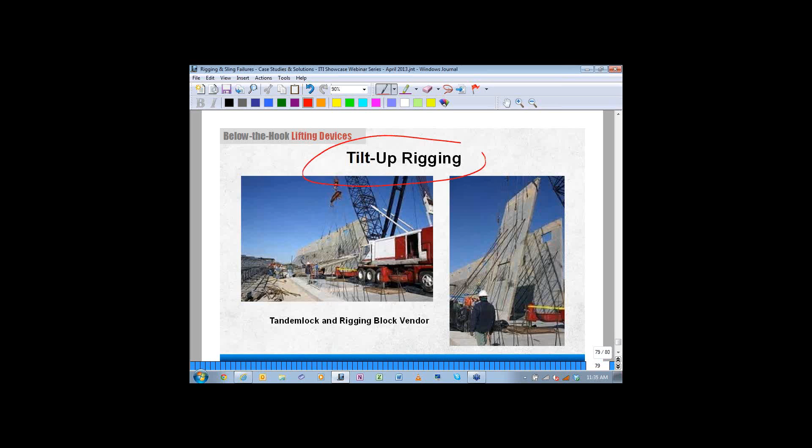Of course, tilt-up rigging, spreader bars, rigging blocks to help turn loads. Use the right tool for the right job. For this kind of work, these are everyday tools for these guys. But we wouldn't want to start substituting rigging in there to help hopefully do the job necessary.

This rigging block is really helping multiple blocks to help spread the load across the surface of those panels, making sure we don't break it, crack it, fracture it, or overstress it. Rigging blocks really do the job. Right tools, right job, help get the job done in a controlled manner.

Obviously, this is a direct connection load. The slings do run through blocks and have a tailing opportunity, or we use the floor for tailing. Great system, but that's really using the proper tools for the right application.

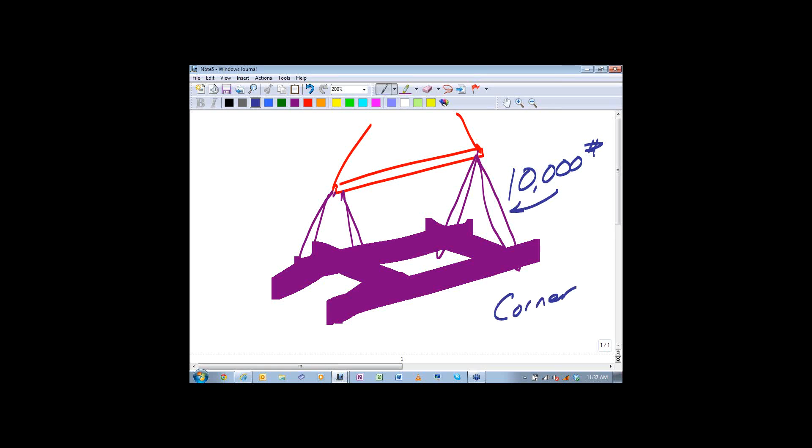So if I know I've got 10,000 pounds in this sling leg, basically what I've done is taken the corner load, and based on the spreader bar and its hingeability, I'm going to assume I've got 10,000 at that bearing point, which includes the angle. So the real load might be 8,500 pounds, let's say, and I've accounted for additional tension based on the angle.

So now I've got 10,000 pounds for that sling, making that contact right there, as it wraps around. Let's say it's a 2-inch sling, 2 inches wide. I've got 10,000 pounds of load at that bearing point. And just for simplistic reasons, we're going to take the 10,000, divide it by my 2 inches of surface, and I've got 5,000 pounds of pressure for each inch of width.

So I got 2 inches right there, 5,000 here and 5,000 here on that 1 inch on each inch of width of that 2-inch sling. I know that's really simplified, but it gets you very close. You have to always account for the angle and the horizontal force that adds to the tension. But that's what that sling's feeling.

If you put your fingers right in there and right in between the sling and the load, and we want to sever those off, it happened in a heartbeat. That's like if you think about it, if we turned all this upside down, that's like putting a full pickup truck bearing pressure right here on that 1 inch of sling material. That's 5,000 pounds of push there and another 5,000 pounds of push right here from an external press or source. And that's what that sling's feeling as it presses into the corner of the load.

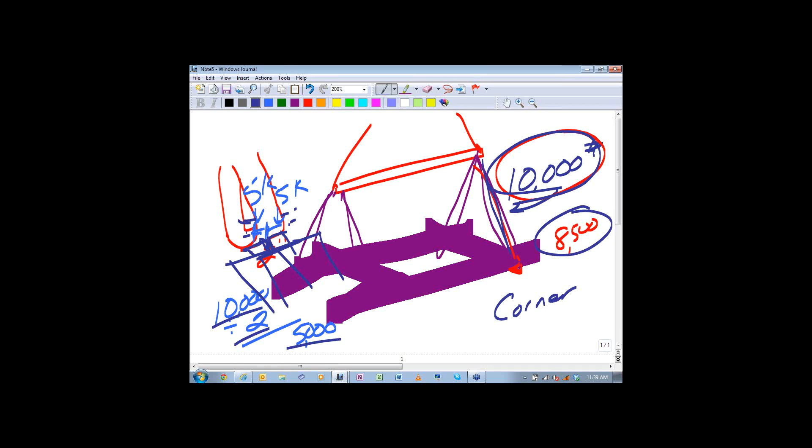I appreciate the question very much. Let's see if there's another question. Yeah, there's several here, I'm going to weed through a couple of them. But one really good question I think came up at the end with Brian: what is the general life of a synthetic sling with proper storage and care?

Good question. There is no shelf life for synthetic slings. They've gone through 10-year tests and really determined that if you take good care of them, if they're good on the day they're born and they've got rated capacity and good breaking strength, and they've been fabricated properly, shelf life's not an issue. I've seen slings easily go from 7 to 12 years in powerhouses and power plants. They don't get a lot of use, but they might be larger capacity slings that get used 20, 30 times a year, and it's nothing to get 7 to 10 to 12 years out of a web sling.

So really, years, you know - I don't think I've ever done this for slings, but what's the lift count? The number of lifts for a sling is not a big deal, but it's how well protected we create the setting point for the sling to the load. So lift count really isn't an issue. I don't think that's a concern, whether it's 100 times or 1,000 times.

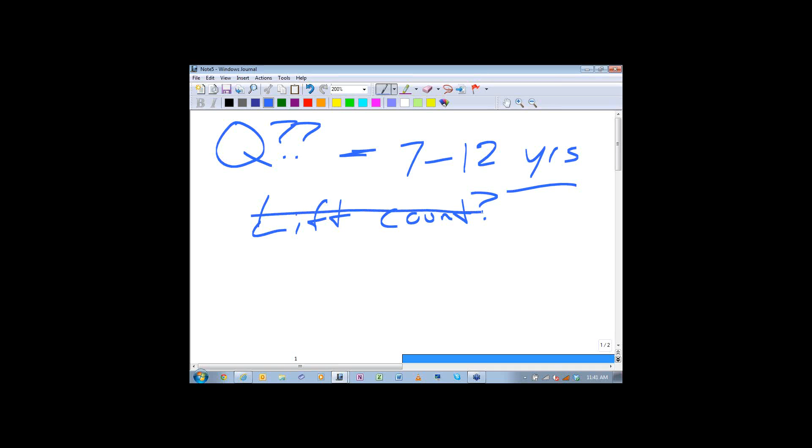It's all about direct contact, and that's what's going to take the life away from a sling. How many times does that sling directly contact the load surface as it lifts? Because as we know, synthetic web slings, as they take tension, they are stretching and elongating, and they might elongate 3 to 5 to 7% as they take tension. That elongation against the load surface by itself is going to create, even for maybe a shaft or other steel objects, some abrasion. And so you do that 1,000 times, and we're going to have an abraded surface. It's just going to happen.

And the more harsh the surface contact is, that abrasion is going to turn into possible small cuts and so on. So I'd say really it's all about how many times is that sling directly contacting the load. There's no magic formula. Certainly some edges are going to be more harsh than others. Do we have sling protection in place?

Most construction projects - the guys I work with, Walsh and Anderson and a number of others - if they can get 3 months out of synthetic slings on their project, they're happy campers. So they're heavily abused, they don't use a lot of sling protection, and if they get a year, they're really a hero because they take a lot of abuse just from normally scrubbing up against or stretching and elongating against the load surface. It's going to cause some natural abrasion, possibly a little bit of friction, but some natural skinning of the outer material, and eventually any recognizable abrasion - nicks, cuts, tears, snags, punctures - all those are really an issue for those slings.

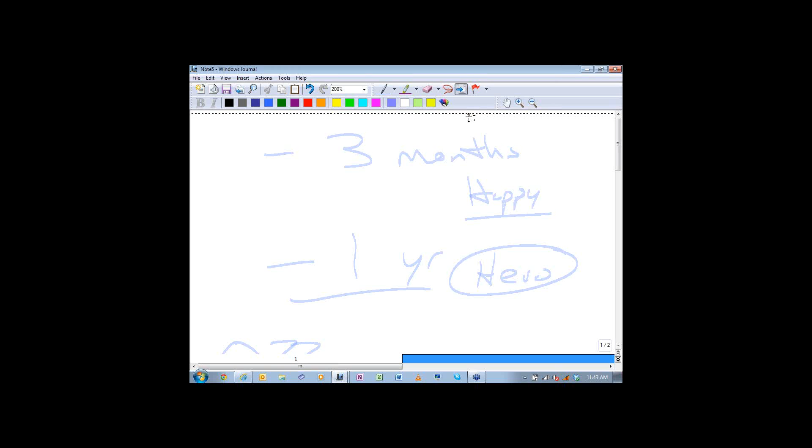The only other thing I would add to that is ultraviolet ray degradation. I think I've shown this a couple of times on our webinars, but at 100% breaking strength, 50% breaking strength down to 0, and down across the bottom, this is months. So at 0 months, 6, 12, 18, and 24, the average life drop-off based on reasonably regular use - maybe 100+ days a year exposed to UV and sunlight - the breakdown of that material can be very significant very quickly, and it's typically sort of in this line. So ultraviolet ray starts to take away muscle from the sling, starts to burn the fibers.

And from the first day it starts to get exposed, it starts to deteriorate that sling. So for slings that are used outside, I'd say the lifespan really - my goodness - at the 3-month window, you're right there.

We've lost maybe 25% of the sling if it's on a regular daily basis used out in the sunlight. Sunlight is a different cause for breakdown for the sling versus the abrasion we talked about a minute ago. But at 6 months, we're at half the sling strength. We're way past where we should be rejecting it.

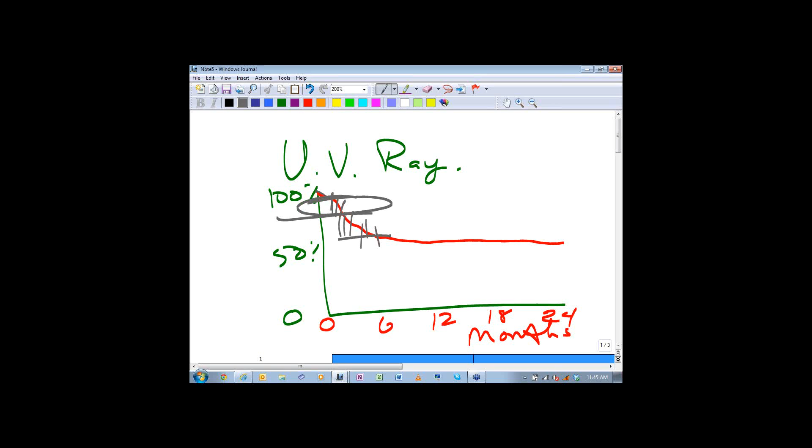We need to be rejecting that sling up in this range when we can identify it. We're going to see discoloration. We're going to see a fuzzy surface to the sling. Where it used to be slick and oily, it's going to be cottony and fuzzy because the fibers are starting to burn to the outside and stand up, creating small hairs to the surface like cotton. When we start seeing discoloration and a fuzzy surface, we know we've got breakdown. We need to reject the sling because of UV degradation.

And we might not even be to the 3-month window on daily, regular, long day use. So that's a whole different animal than the abrasion or cutting or snags or punctures, but it's something that's very real, and it steals strength faster than anyone's ever really accounted for before. There's been 2 really good tests done by AWRF, Associated Wire Rope Fabricators, on breakdown of synthetic materials. They've done a marvelous job to help protect us in the field about the effects of sunlight and welding exposure to synthetic slings.

Great question. I appreciate that. I hope I've got some good answers for you out of that. All right, awesome. Go ahead with the next one.

There's a good question on sling protection. Why do you recommend against using fire hose to protect sharp corners? Are there any acceptable applications for using fire hose to protect slings?

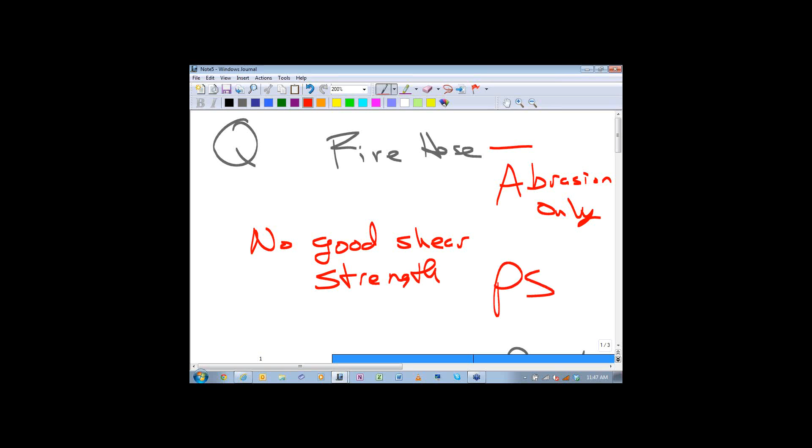I'm going to suggest to you that fire hose is really restricted to abrasion only, and there's no good shear strength in fire hose, and that's really the secret. It's all about PSI, about what that load corner is going to induce and push into and shear in that fire hose. So the big answer really is fire hose, abrasion only. That's really the deal. It can certainly serve in that role if abrasion is the issue. But when it goes to a corner, it just doesn't have the robustness, thickness, durability, and constitution to withstand the pressure created by the sling pushing into the load edge as it starts to lift.

And it can shear it in a heartbeat, and the sling's now bare naked against the edge of the load, and we can cut the sling and drop the load. So there's my take on fire hose: limited application, abrasion only.

Okay, excellent. Well, I think that about does it for the questions. There's several similar questions to those, regarding rubber pads, for instance, for sling protection. I think you just kind of answered it. Same answer, yeah, same answer.

Steve asked, do you have pre-job briefs available for any of these incidents? I'm not sure if you do. In most cases, in the accidents, maybe, is that kind of the question direction? Yeah.

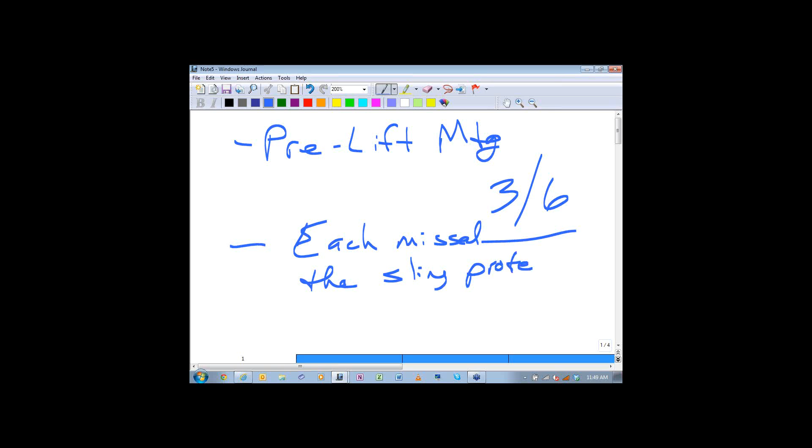Really, I can tell you that of the 6 accidents that we evaluated, there were in some cases a few pre-lift meetings, and if I can recall correctly, 3 out of the 6 at least had a pre-lift meeting, but each missed the sling protection issue and a little bit on the rigging calculation.

So really at the end of the day, even though a pre-job meeting, pre-lift meeting occurred in half the cases, they really missed the step on, yes, we have the right slings, yes, we have the right capacity, well, we're good to go, we got the load controlled—that's the assumption. What's the next question? So they kind of breezed through that, but what they really missed was the sling protection to do the job, and that was the biggest downfall in most of these cases that we've evaluated.

That's a great question. So don't take it to heart that, gee, just because we did a pre-lift meeting, we're all locked and loaded and everything's perfect. That is a grossly wrong assumption. We want to make sure that we've got everything protected and secured as needed.

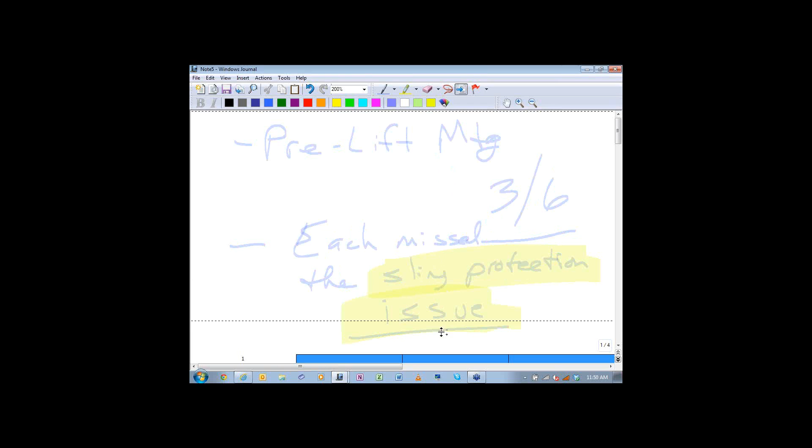Great question. Okay, one other came in, and Jim Worrell actually asked a good question, but you were talking about the bump fender—or sorry, the pump, I think it was—when you were referring to one of our customers. Did your pump customer take into account, with the lifting lugs on the skid units, the center of gravity?

Most skid unit fabricators do not do this. Yes, good question. As we add pick points like that, they've got to be robust enough. The orientation of the lifting points is what we really worked with, and this is a great question.

If we do a top view of this thing, the orientation really ideally is towards the center of gravity. That would be one thing we'd first encourage a client to think about: the strength of that lifting lug needs to be 90 degrees to the plate, pulling to the CG, so that it's welded in the right orientation, supported properly, and so on.

Another element, and this is a bit of a long-winded approach, is we encourage folks to look at it so that two legs can support the whole load. So if the slings attached in the field or the factory are only loaded heavily on two corners out of the four, can the design of the pad eye sustain two legs taking the whole load at 30 degrees, very flat? That's a rigging angle issue.

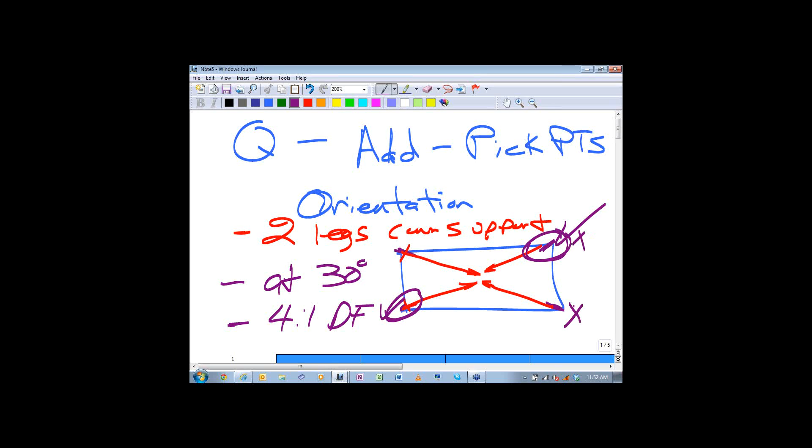Chain slings aren't any more than 4-to-1. But what we've done is, instead of creating a lightweight design where a design engineer might think he can get 4-corner loading, which isn't very realistic, we require he design it so that 2 can carry the load, even at 30 degrees, even at 4-to-1. When you add all those things together, you've probably done a pretty good job on your defense for that pick point and those rigging points.

And in answer to Jim's question, that will help resolve a lot of issues related to CG. Not perfectly, but when you build up those pick points to that level, your center of gravity might be off 5%, 10%, or 15% based on where the pump's sitting, where the motor's sitting, and all that. If you know the pump's going to sit to one end, you might even have a definite 80-20 split, well certainly we're going to have to design to that.

But for a standard package, we're going to initially try to design where its final resting point for the center of gravity will be in its total load configuration, and then design to that for distribution of weight in all directions, at its heaviest point, in a fully loaded status. So we start with some preamble items that help us get there, and certainly focus on the center of gravity as our finished package heaviest weight condition.

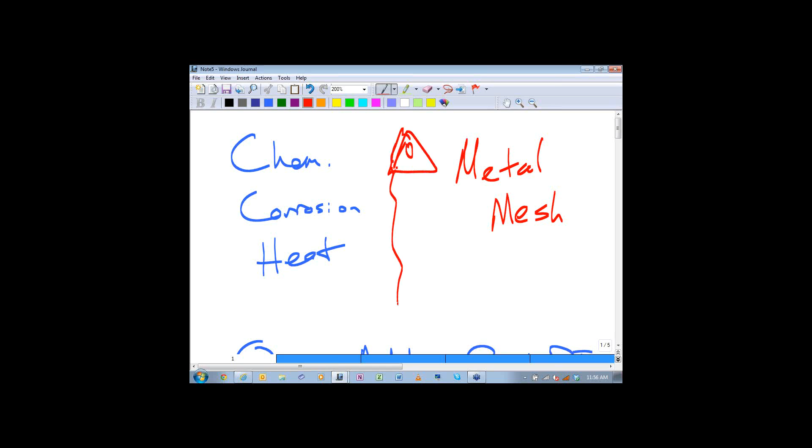In this particular situation, I would go one of two ways. Metal mesh slings made by Lift-All and others have a triangular end connector and are made for dipping, high heat, and corrosive environments. Some are made with a slot for choking, and some are just for basketing off a spreader bar, using two of them for that process. Metal mesh slings would probably be my first consideration because they're very flexible.

Some can be made out of product that's not carbon steel so they'll last longer in a highly corrosive or chemically reactive environment. I know in some weird applications folks will allow stainless material to be used, but specific to that manufacturer, with a rated load specific to it and specific instructions for inspection.

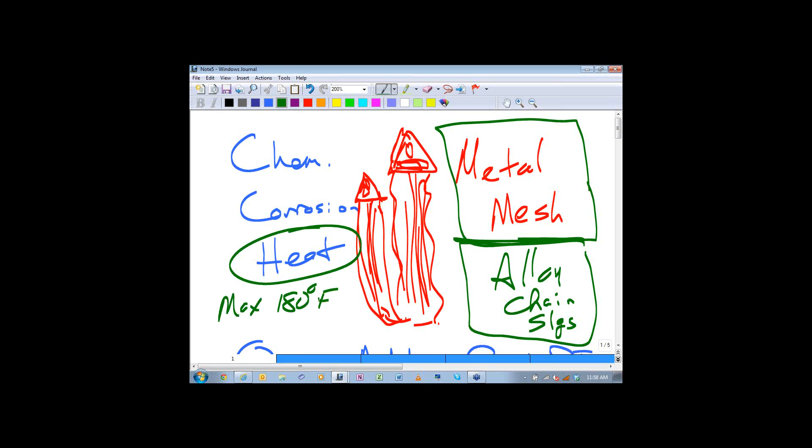These also deal with heat way better, because the maximum heat for a synthetic sling is more or less 180 degrees Fahrenheit. Whereas with metal mesh or chain, we're looking at anywhere in the 400 degree range up to 1,000 or 900 degrees or so. So heat is just not a big issue for standard applications for metal mesh or chain, but certainly an issue for synthetic rigging.

So any of those three conditions, I'd be running away very fast from introducing for synthetic products. I'd always be looking for a steel product to serve. Wire rope doesn't really get you there, and it doesn't have as good a heat range or the flexibility. So metal mesh and alloy chain probably would be our better bets.

And if they have a hard time getting a rigging vendor or supplier, give us a call. We'll find where they're at, and we can point them to 2 or 3 suppliers in their area that can provide those products.